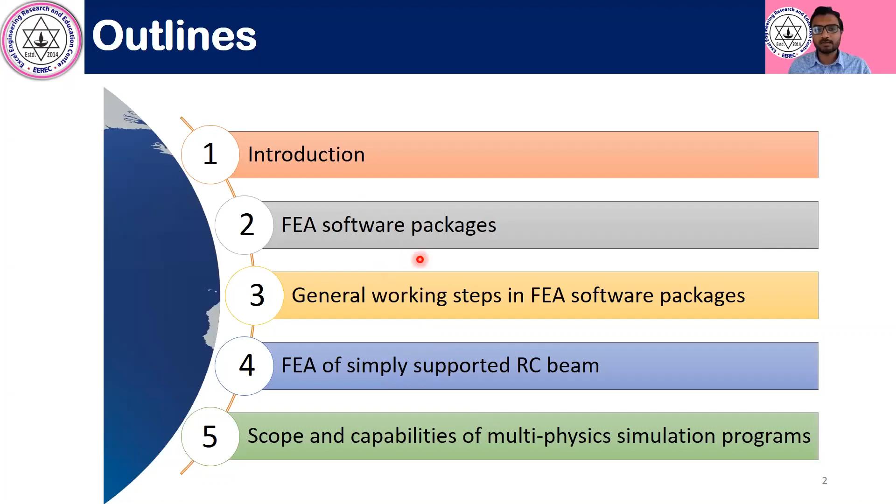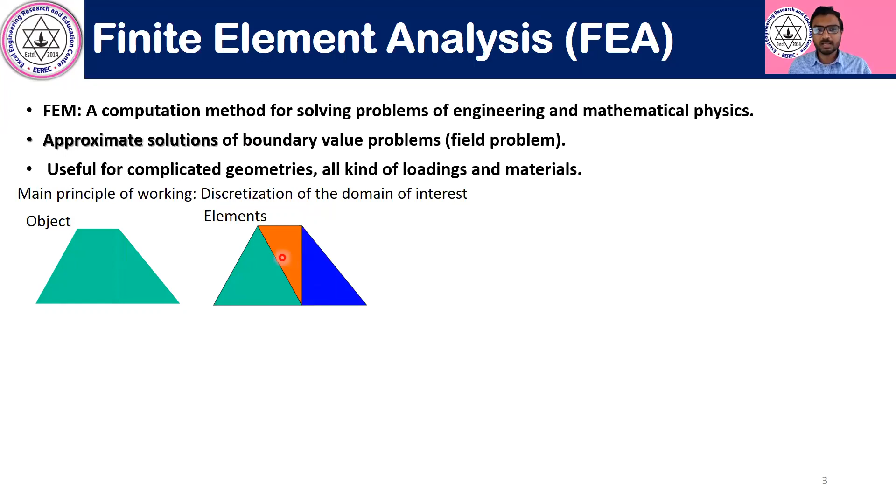FEA program. So first, FEM is a computational method that works based on the approximate solution of boundary value problems. The main working principle of FEM is discretization of the domain of interest. That means if we have an object or problem, we discretize this object into a number of finite elements, and each element consists of several nodes at its ends, and we know the solution at the boundary, and based on that solution, we interpolate the solution to the other nodes.

So in finite element, basically, we deal with nodes, and these nodes make elements, as we can visualize from this picture, and a combination of many elements makes a structural part, and an assembly of these parts makes a structure. For part and structure, maybe this picture would make it clear. For example, in this picture, this water is one part, this embankment can be considered another part, and the soil can be considered another part.

Again, in this example of a reinforced concrete beam, we can treat concrete as one part, stirrups as one part, and the longitudinal bars as one part as long as the longitudinal bars have the same diameter. So generally, a part is a structural component that has the same geometrical and material properties. Regarding elements, we have basically three kinds: beam elements, as in the reinforcement bars, then shell elements, plate, two-dimensional, and solid elements.

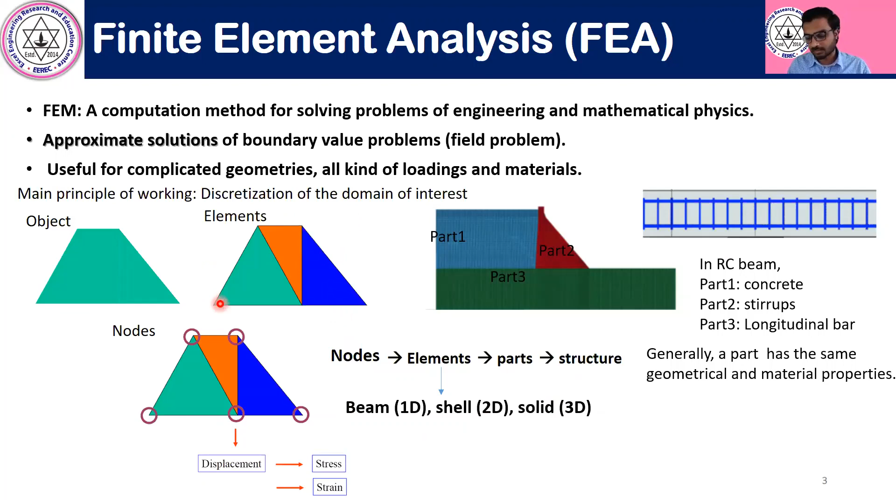In this webinar, I have not covered the theoretical aspects of these element types and different interpolation functions. Mainly, I have covered the practical aspects of finite element analysis. So, if we talk about the advantages of finite element analysis, according to IEEE, there are basically six main advantages.

The first one is that by using the finite element method, we can model any kind of complex geometry and irregular shape, as we can also visualize from this picture. Also, by using the finite element method, we can get results with good accuracy so that we do not need to test our physical prototype, which obviously saves time and money. And we have many short-term and long-term time-dependent simulation options and different kinds of boundary conditions in FEA software packages.

And finally, we can visualize our result in terms of different interacting environments like photo, video, graph. So it is really easy to understand what is happening in the structure if we simulate by using nonlinear FEA programs.

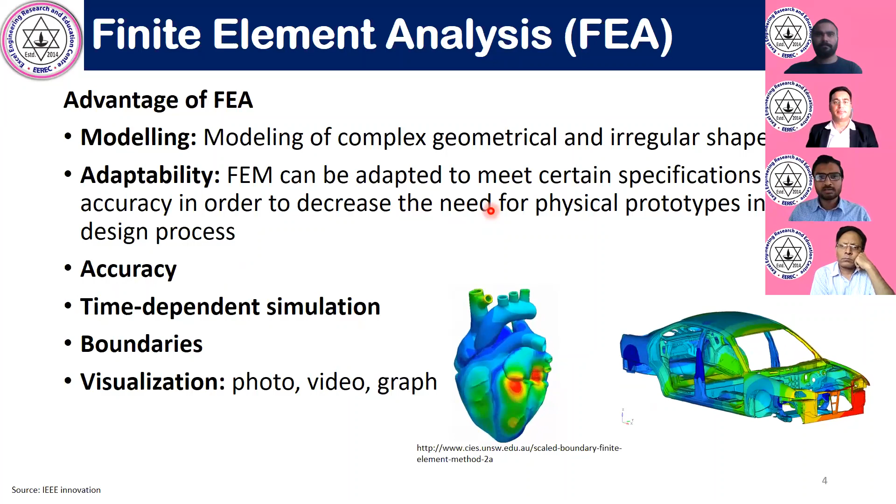Regarding the field of application of these nonlinear programs, generally we can use them in all sectors where we deal with stress and strains. So it covers all the aspects of engineering like civil, mechanical, aeronautical, biomedical, almost all those areas of engineering. If we typically talk about structural or civil engineering, we can use it to analyze buildings, bridges, or typical structural components like beam-column joints, or beam only, or interaction between fluid and structure, and different other aspects that we'll see in later slides.

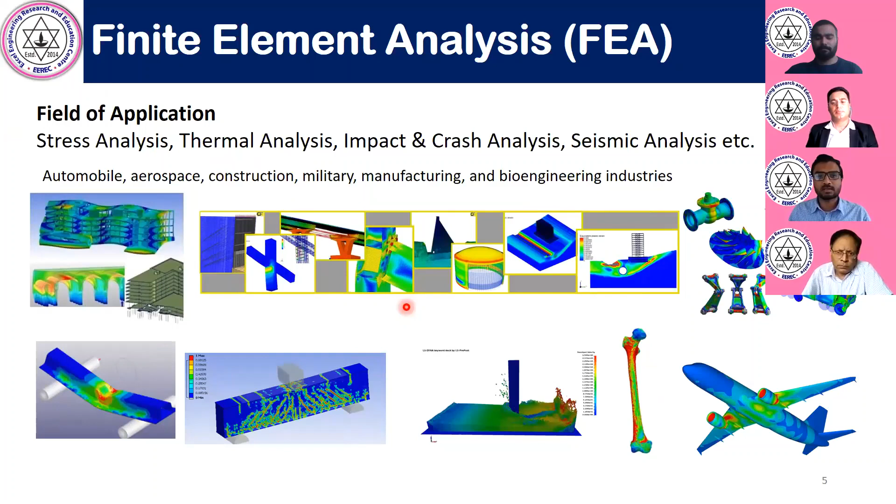So next, these are some of the FEA software packages, and I divided these packages into two columns. In the first column, software like SAP, ETABS, SAFE, STAAD Pro, and in the second column I put Ansys, LS-DYNA, Diana, and Marc, etc. And the main difference between these software, if I talk about the performance evaluation...

If we talk about the positive part, they are relatively easy to use, and they require very less computation time and resource. For example, we can solve a 4-story building model using ETABS in less than 1 minute. That's really a good part of it. And also it gives good accuracy for the global performance. One most important part is in most of these software packages, we already have the design code. So they are really suitable for design of standard or conventional structures like reinforced concrete frame, masonry.

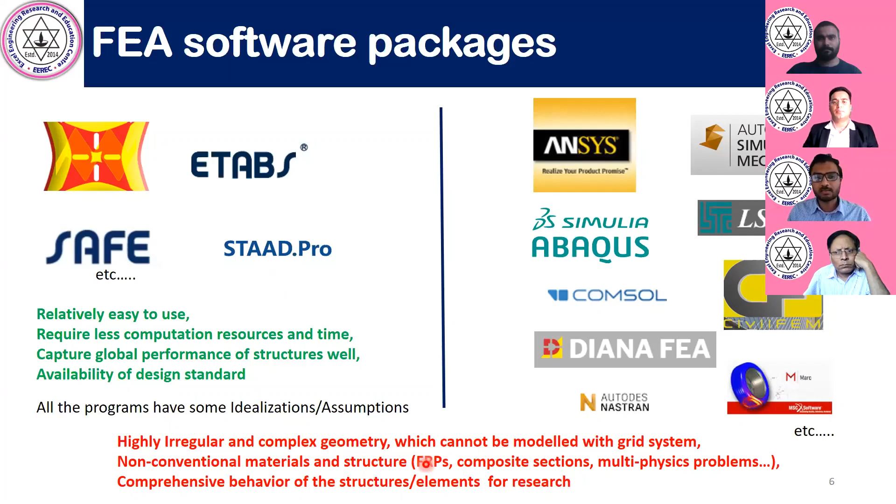But when we have to deal with highly irregular structures or highly complex geometries, then we cannot model with their grid system, so we need to move to slightly more advanced software. Also, when you want to analyze a structure with non-conventional material, let's say like fiber reinforced polymer or some composite section, then again they are not suitable for that kind of analysis. So we move to software packages like Ansys, LS-DYNA, Abaqus.

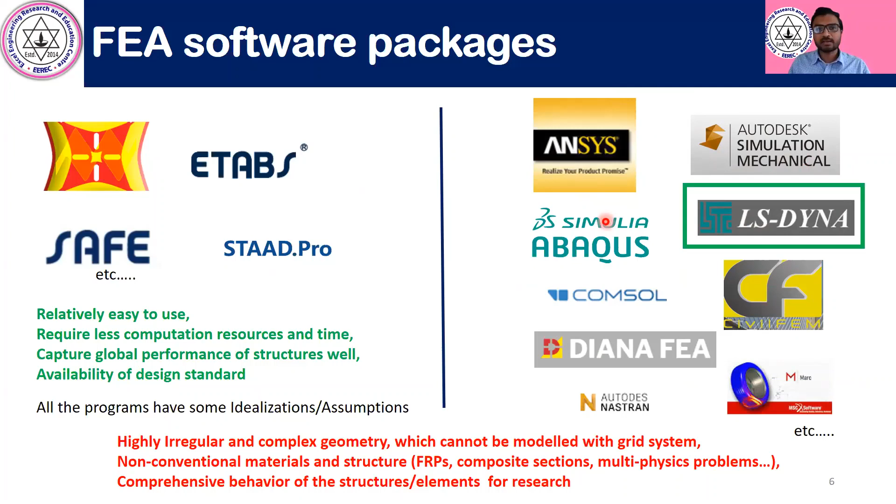Regarding the capabilities of these software packages, more or less they have similar capabilities. But in this webinar, I have been working in LS-DYNA, so most of the simulations are based on LS-DYNA. If we talk about LS-DYNA, this is a general purpose finite element code, and it is capable of simulating almost everything in the world. So all the complex multi-physics scenarios in the world can be simulated in LS-DYNA, and these are the major capabilities of LS-DYNA.

We can simulate from linear static, non-linear dynamics, crack propagation, real-time acoustics, almost everything in the world. And if we talk about some beautiful feature of LS-DYNA, we can couple two multi-physics scenarios, like we can, in the same model, consider structural and thermal part, or structural and acoustic, or all of them at the same time.

And also, if something is not available in LS-DYNA, we can create it by ourselves by scripting. So it is really useful in research.

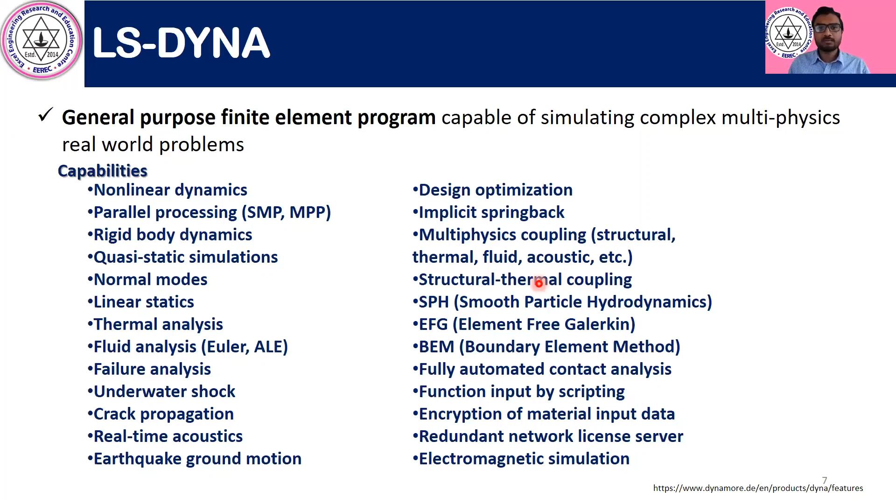So now we move to the next section, general working procedure. These steps are not only for LS-DYNA, but they hold true for almost all software packages. So we have, in general, 3 steps when working in FEA packages: the first one is pre-processing, then solver, then post-processing.

In general, pre-processing is the phase of preparation of the model. In the pre-processing phase, we create geometry, then we mesh, assign appropriate material model, and apply boundary conditions and load. After preparation of the model, we pass that model into the computer. In the solving phase, we don't need to do anything, everything is done by the computer, and it gives output. That processing of the output is the post-processing phase. For pre-processing and post-processing, each software package has its own user interface.

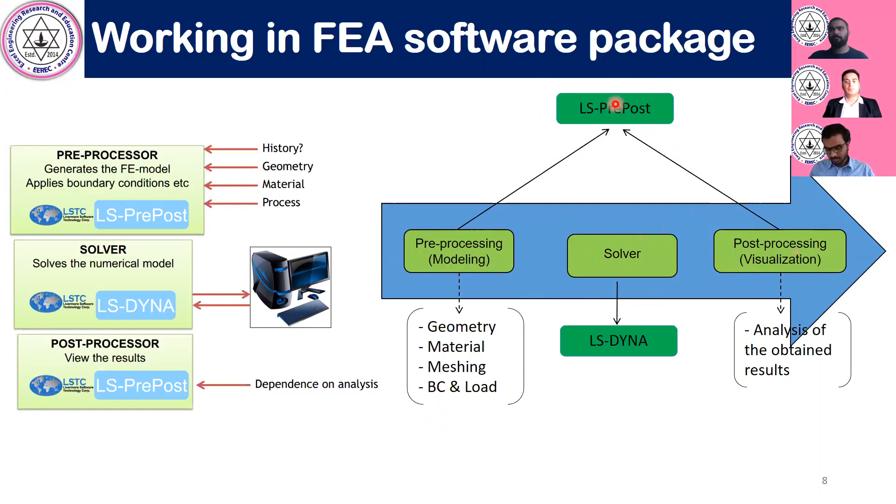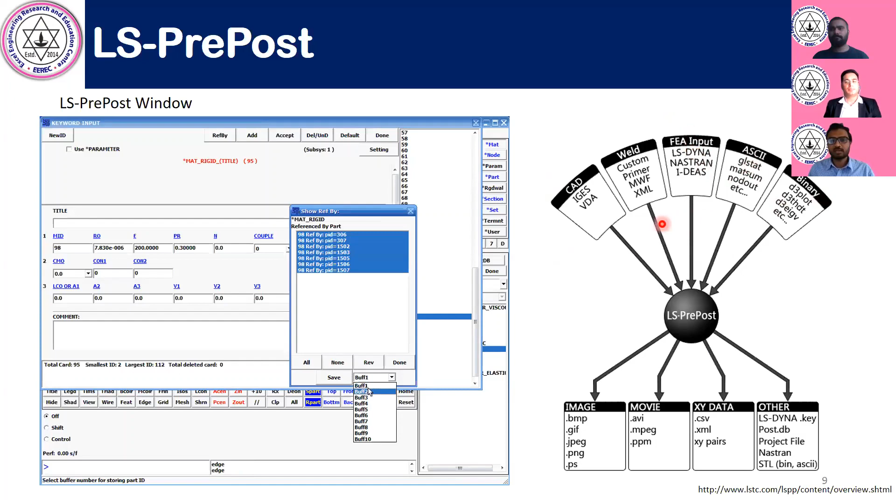For that, LS-DYNA also has its user interface, and we call that LS-PrePost. This is the graphical user interface of LS-DYNA. Here we can do many things, like we can prepare CAD for model, also welding option, we can input different finite elements, and it also supports ASCII and binary files. Regarding the output, we can get the result in terms of image, movie, XY plot, or different other standard interactive environments.

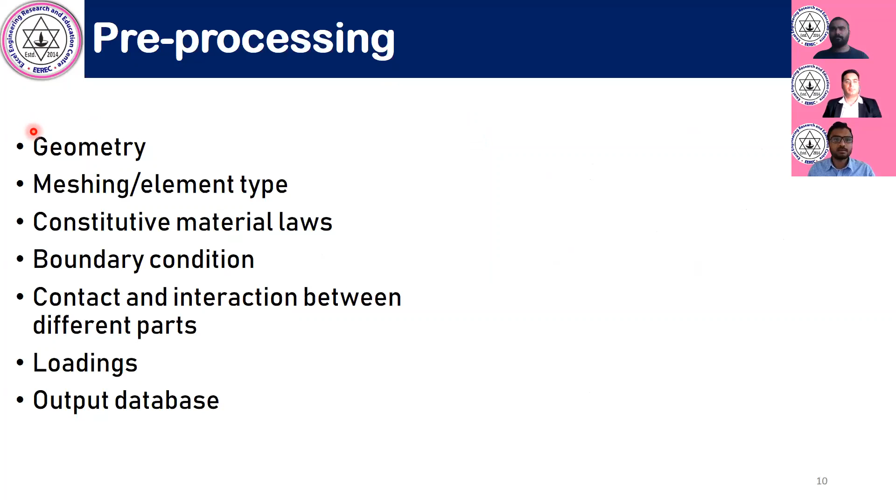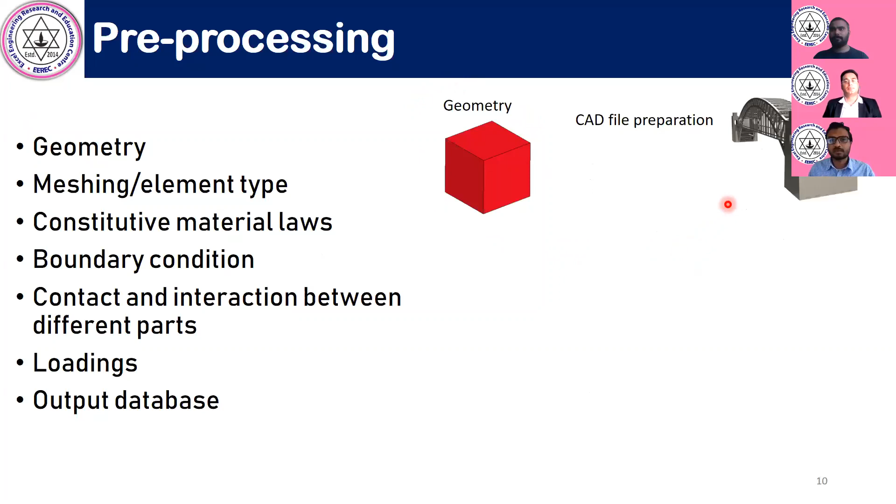So now after that, I would like to move to this section. Mainly these are the steps that we carry out in the pre-processing phase, and the very first step is geometry. So we just replicate the real structure in the computer in the form of CAD, and then we divide them into finite elements, that's meshing.

When meshing, generally we prefer fine and regular meshes, but one problem here is if the mesh is really very fine, the computation time will be very high. So we usually do the mesh convergence study to find the optimum mesh size at this step.

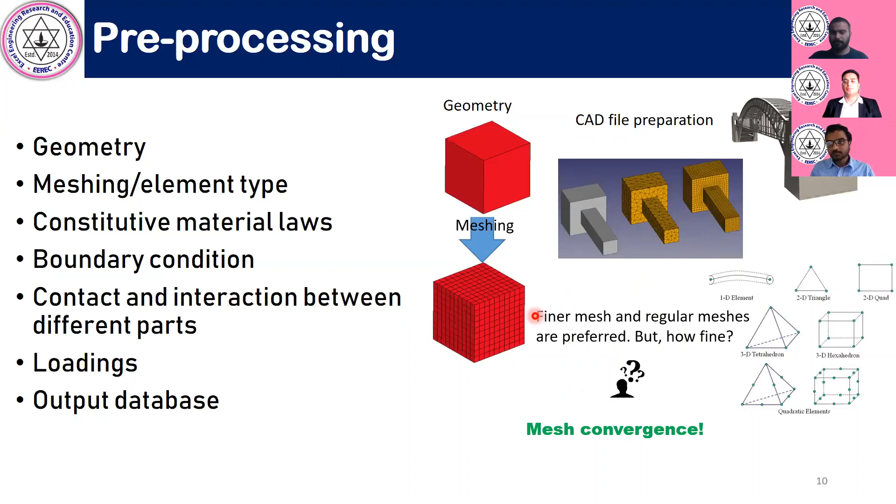After that, we need to select the appropriate material model, also called the constitutive material law. Its main function is to define the relationship between stress and strain at different loading states in the element. Initially, all elements have linear behavior, but in the non-linear range, different materials behave differently - some show brittle behavior, some strain hardening, some softening. When selecting this constitutive material law, we should have knowledge of mechanics of materials, how the material behaves in the real world, and the theory of the material model in that software package, so we can select the appropriate law. In LS-DYNA, we have more than 270 material laws, covering almost everything.

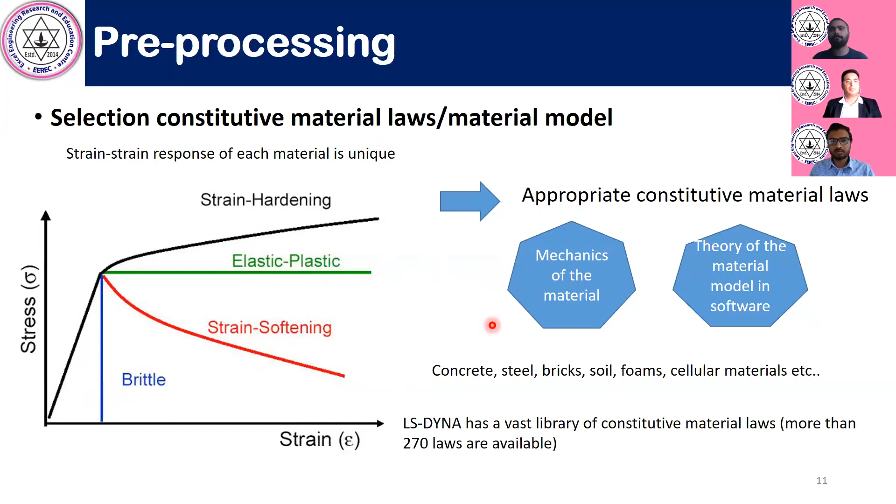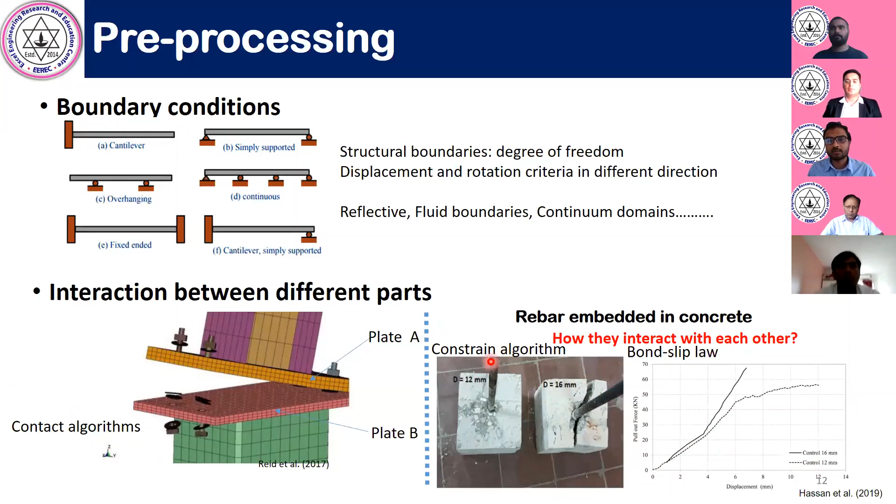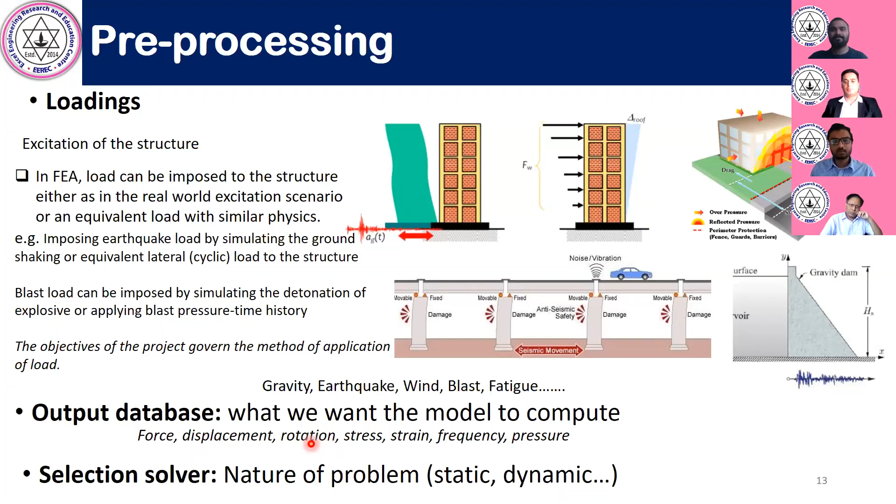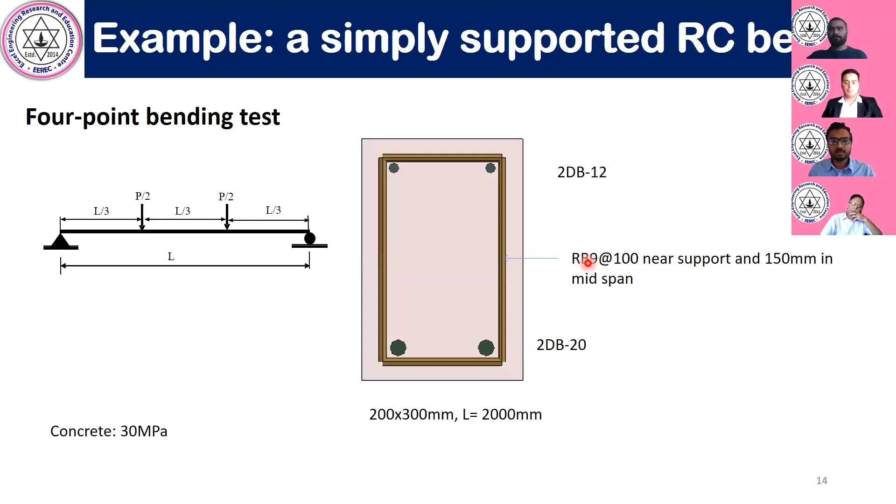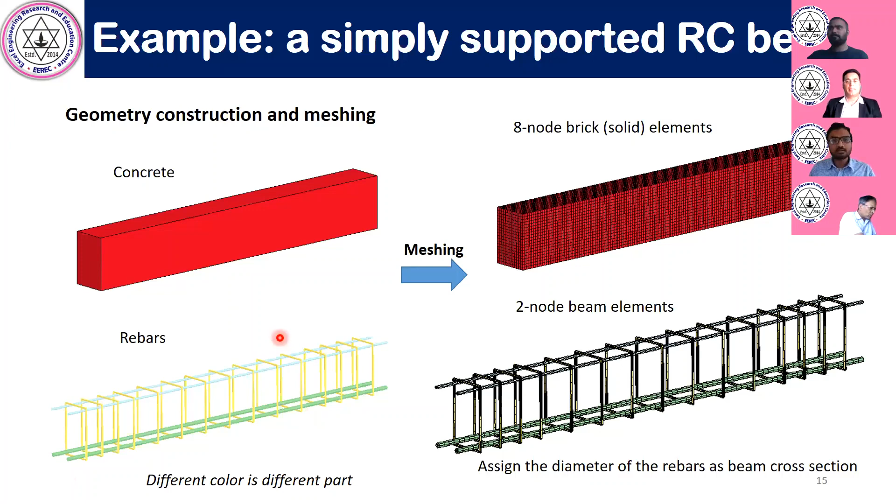The first step is creating the geometry for all the components - concrete, and we create all the rebars one by one, then mesh it into appropriate size. I used an 8-node brick element for the concrete and beam elements for the rebars, assigning their appropriate diameters. In just this small structure, I have 4 different parts: concrete is one part, top bar is one, bottom bar is another part, and the stirrup is another part. I need to define the interaction between them.

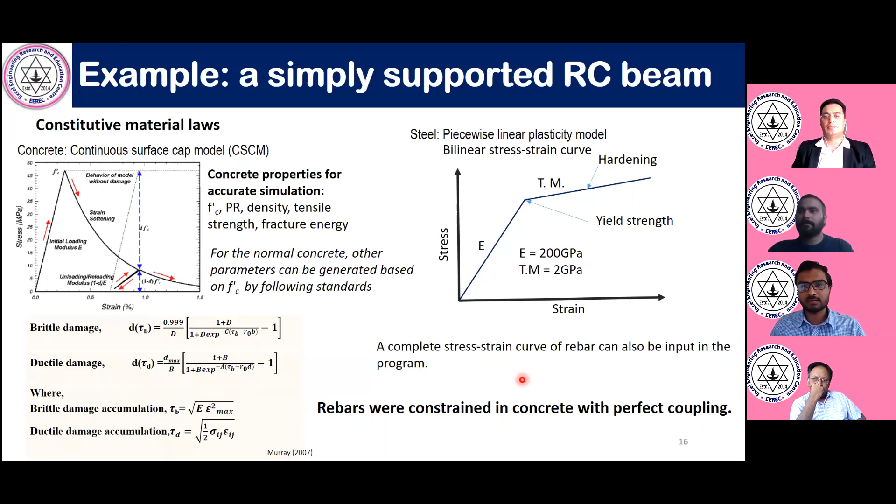In this simple problem, I constrain the rebar in the concrete as a perfect coupling, so they won't slip at all at any loading state, but it may not be valid for all problems.

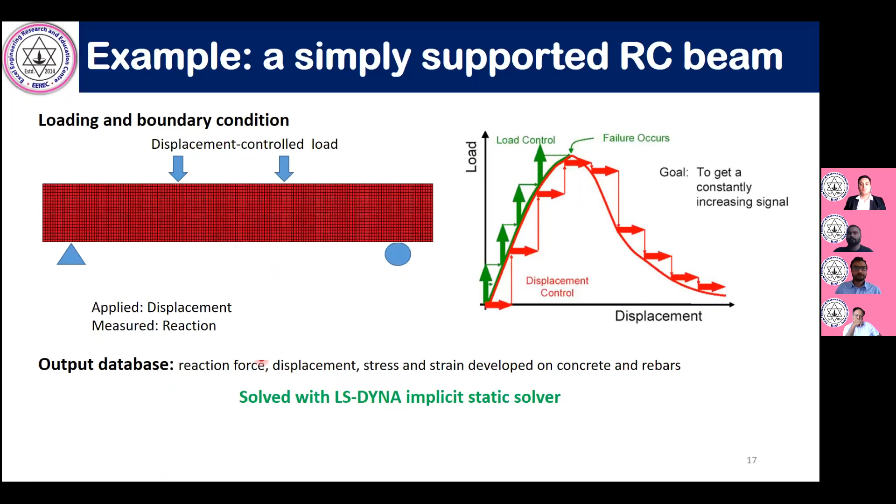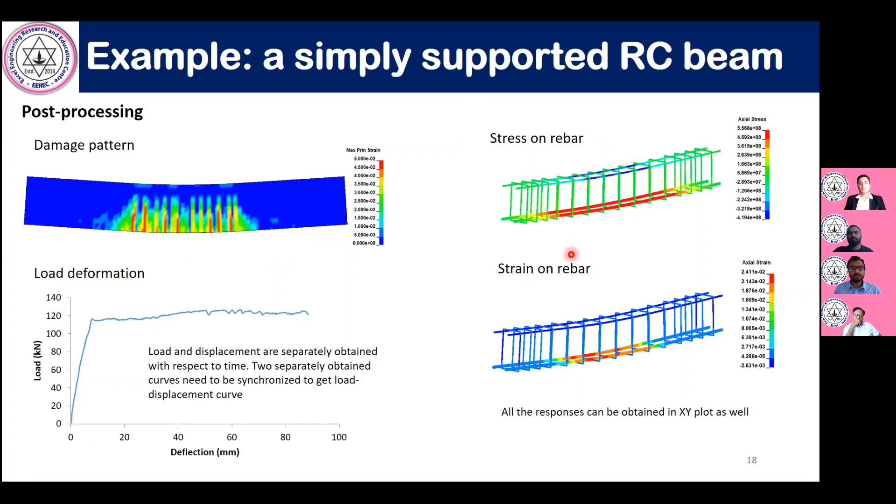The most important part here is how do you know these results are correct? Because software may not give the correct result all the time, so we should always verify and validate our model appropriately.

There are so many methods for validation and verification of the model. Following this book, generally verification deals with the mathematics or the concept. For example, for a static structure, one way to verify our model is a simple force reaction balance check, or for a dynamic problem, checking if momentum and energy are conserved. That way we verify the concept. But validation, which deals with physics or real world scenarios, the most widely followed method is experiment.

This is the same beam that I showed in the last slide. We can compare the response from the finite element model with the response from the experiment, so we can validate our model if possible. This is the most widely followed method in research for validation of our model.

But sometimes we may not be able to carry out the experiment for a large scale structure. In that case, we prefer some kind of pilot experiment, or we follow other theoretical approaches to validate our model, like mesh sensitivity, or checking if constitutive materials are working appropriately. If you are working in computational science and engineering, this book is really good to know about different techniques to validate and verify our models. I took all these methods from this book actually.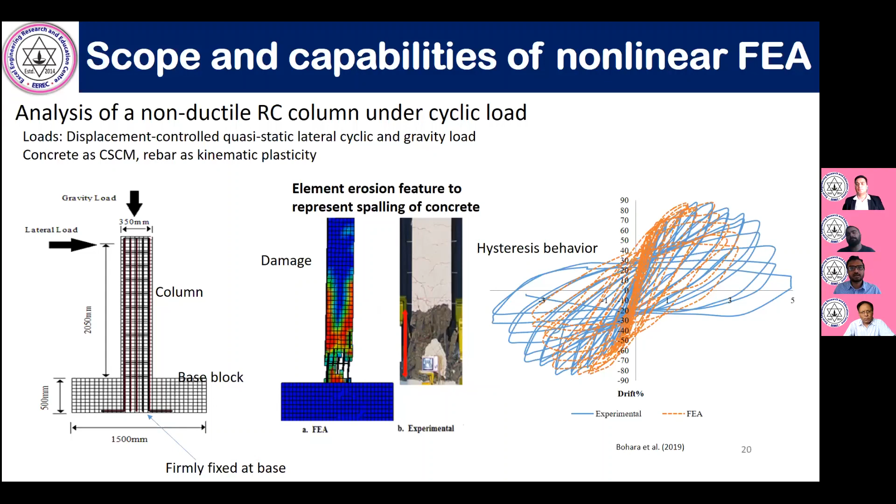Next example is analysis of a post-tension RC beam column joint under lateral cyclic load. If you are not familiar with testing of beam column joints, we only consider the portion of structure between the points of inflection. We apply a roller support at the end of the beam and a hinge support at the base of the column, then apply lateral load and gravity load from the top. We can see how accurately LS-DYNA has predicted the hysteresis behavior and damage on the concrete.

The most important part is pre-stressing. This pre-stress should be present in the structure before the external lateral and vertical gravity loads act on it. To simulate this kind of behavior, we need special features like dynamic relaxation in the software, which are present in nonlinear FEA programs like LS-DYNA.

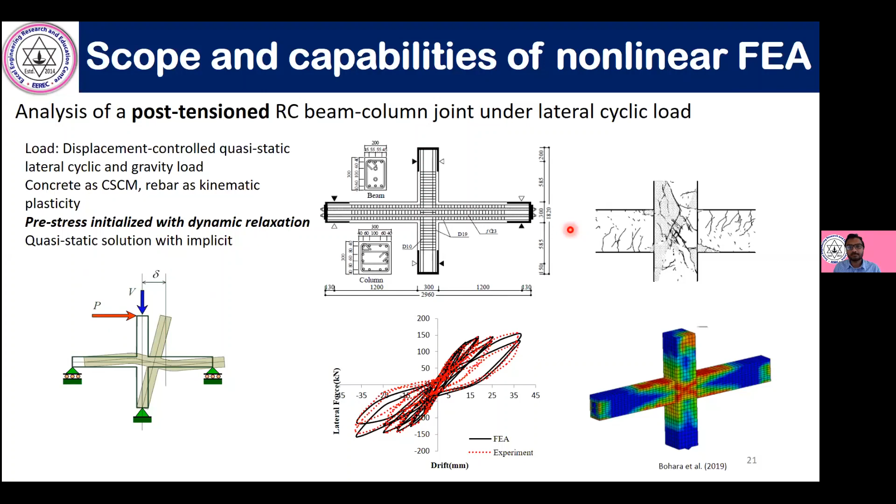The next example is about a composite structure with two kinds of concrete: precast and cast in situ. This is a typical beam column joint from this structure, and what we want to simulate is, under lateral cyclic load, how much slip occurs between the cast in situ concrete and the precast concrete.

Generally this kind of analysis is not possible with normal programs, since we have to deal with different kinds of contact for this interface. So we need nonlinear FEA, and using this kind of program we can also predict damage patterns and different responses like hysteresis, displacement, ductility, and load transfer mechanism.

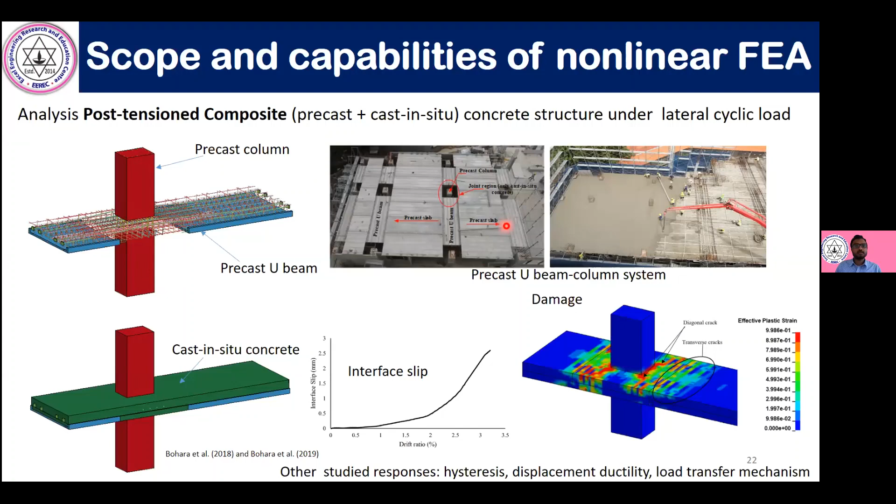Next is an example of a shear wall under lateral cyclic load. Here we applied the lateral load in the in-plane direction, and we want to investigate its hysteresis behavior and damage in the shear wall, the concrete damage at different loading points, and also rebar buckling and rebar fracture.

Here you can see how accurately the program predicts the hysteresis behavior at different stages, and also what is happening in the concrete and rebar at the same time. This kind of post-processing feature also helps us visualize and interpret our results easily.

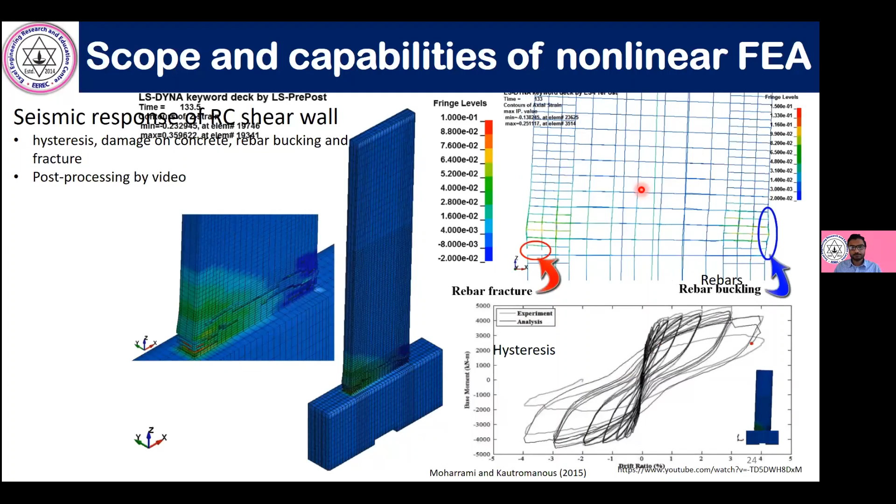The next example is an analysis of a steel frame. So far all the examples were based on lab tests, and this example is quite different than the previous ones.

Here we have a steel frame, and we applied seismic time history at the base. We want to see how this bracing works and what the ultimate collapse mechanism is for this structure. I'm not sure about the exact seismic time history used, because I didn't simulate this structure myself, but looking at the failure mechanism, it seems very high.

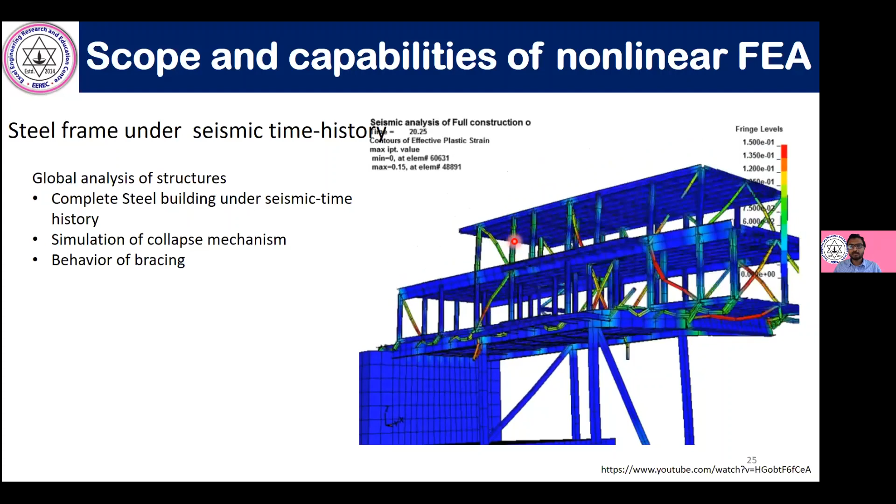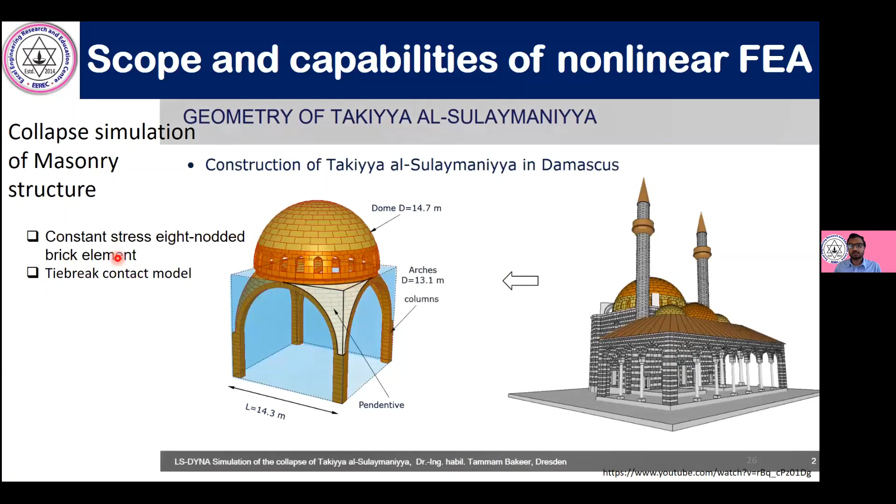The next example is a simulation of a mosque or masonry structure, and we want to see how this structure behaves under seismic time history. In modeling, the brick has been modeled with constant stress 8-noded brick elements, and the contact between each brick is idealized with a tie break contact model.

This is the seismic data in all three directions, and we can see the output in the program.

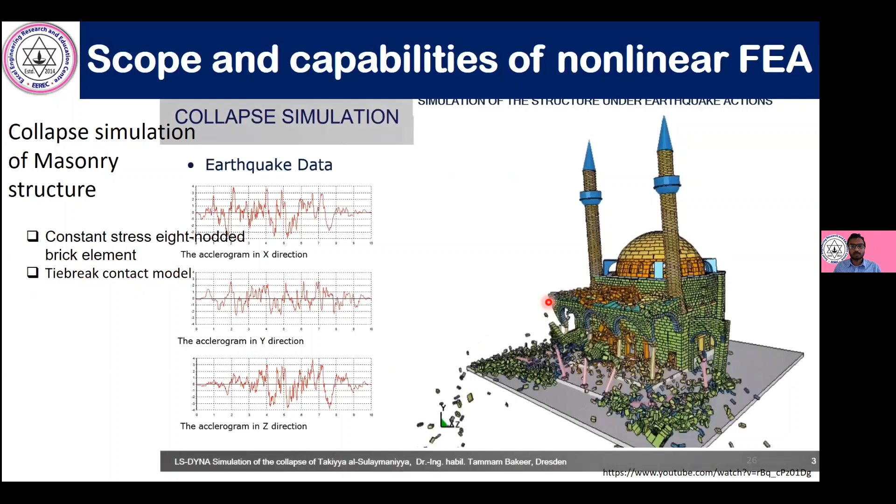Now I move to another example: road safety structures. As we know, these road safety structures are really important for minimizing accidents and probable casualties. We analyze this kind of road safety structure under the impact of a vehicle.

This impact of the vehicle leads to very heavy damage or very high deformation, so we cannot treat them with normal kinds of programs. We need nonlinear FE, and it should be quite advanced as well, because it is really difficult to simulate this level of damage using the program. As far as I know, most of the simulations and papers on this kind of analysis are based on LS-DYNA, maybe because of its large material database and other features.

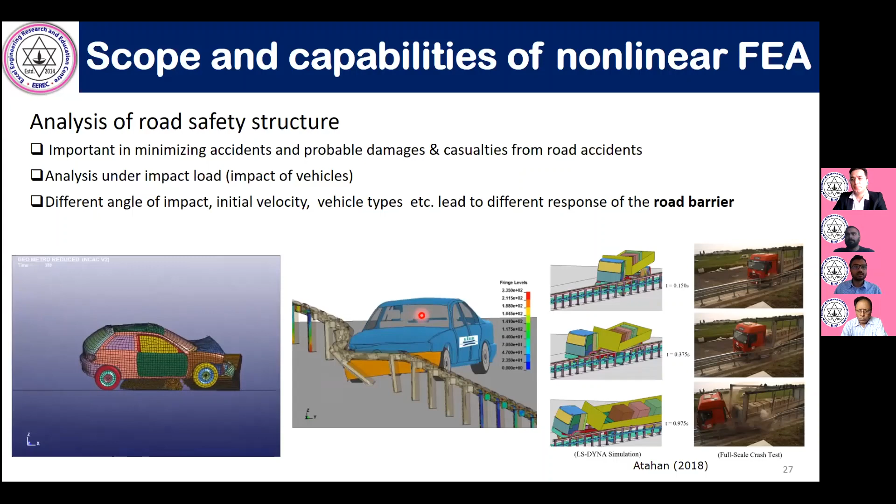And the next example here is analysis of railway structure. As we know, in railway structure we have several components of different material like steel rails, then concrete or timber sleepers, gravel, and subgrade. And at the same time, different kinds of load act, something like wheel load. At the same time, this rolling of the wheel causes friction and heating, and also the continuous loading and unloading causes fatigue. So we need to consider this multi-physics scenario at the same time. And for this kind of simulation also, we need to move to the nonlinear FEA programs.

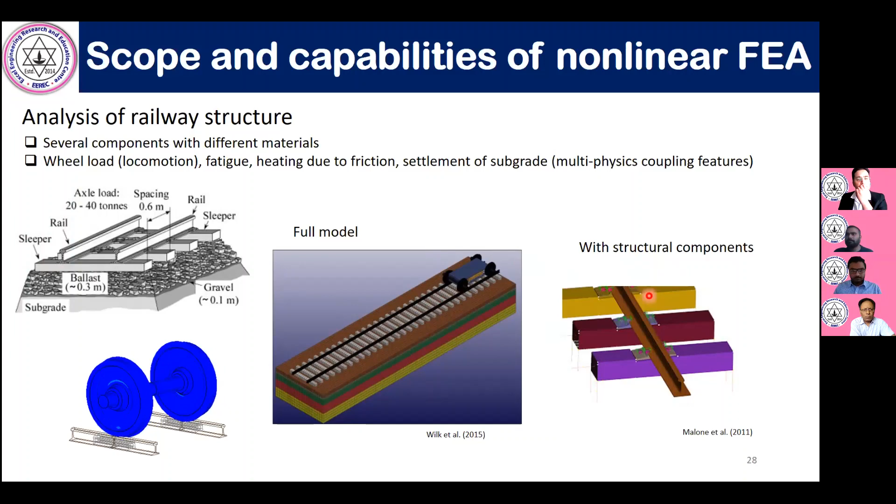And the next example here I have is a typical analysis of hydraulic structure. And the most beautiful part of this LS-DYNA is we can couple both fluid and the structural part, and we can see the response of structure and the fluid at the same time. Something like this is the deflection of hydraulic gate, and at that time what is the velocity and pressure in the fluid. So it really makes it easy to understand the problem and accurately simulate the physical behavior of the structure. And this problem was typically solved by using SPH, smoothed particle hydrodynamics, so that it is more accurate for the fluid problems.

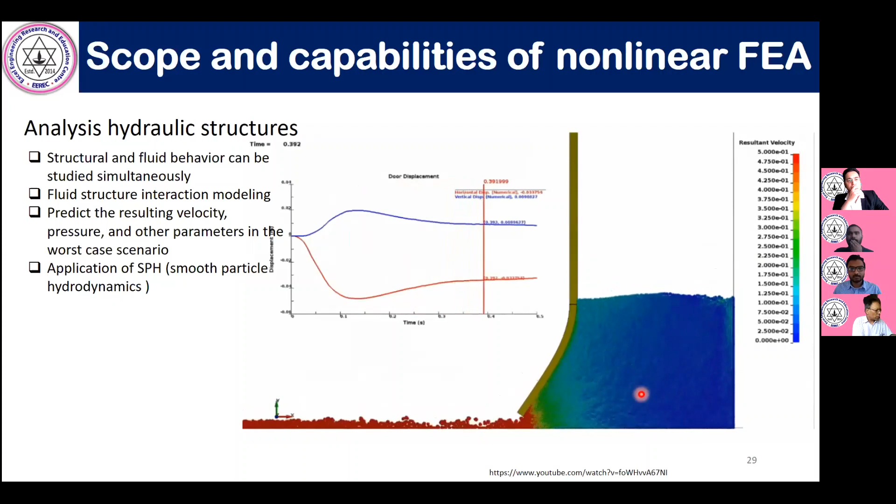And now I move to another example. This is a typical example of drilling mechanics. So we can do this kind of simulation as well in LS-DYNA. And this example, I think, is typically useful in civil engineering for analysis of rock during tunneling, and may be useful for predicting different stress and strain on rock. And also later it can be used for the analysis of support and other parameters in tunneling.

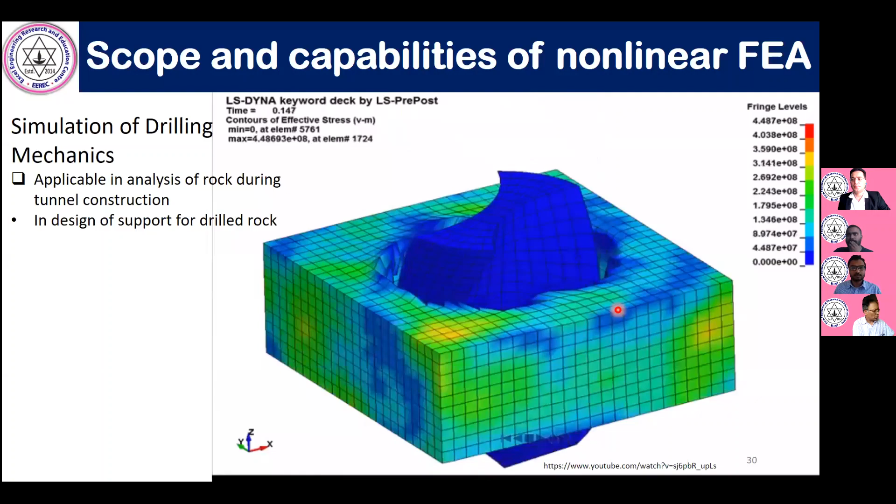And one more example is about the defense structure. And this small structure is called the earth-covered magazine. As I used to work with the Royal Thai Army for structural analysis, I typically take it from that one. So these structures are mainly used for the storage of explosives, and we analyze this structure based on the accidental scenario. Something like if one of the structures explodes, it should not harm the explosives in other ECMs, so that the chain reaction is prevented. So this is a typical analysis scenario of earth-covered magazine. So we just take the two structures and cause the explosion in one ECM and see what is the response in another. That's the design philosophy for this earth-covered magazine.

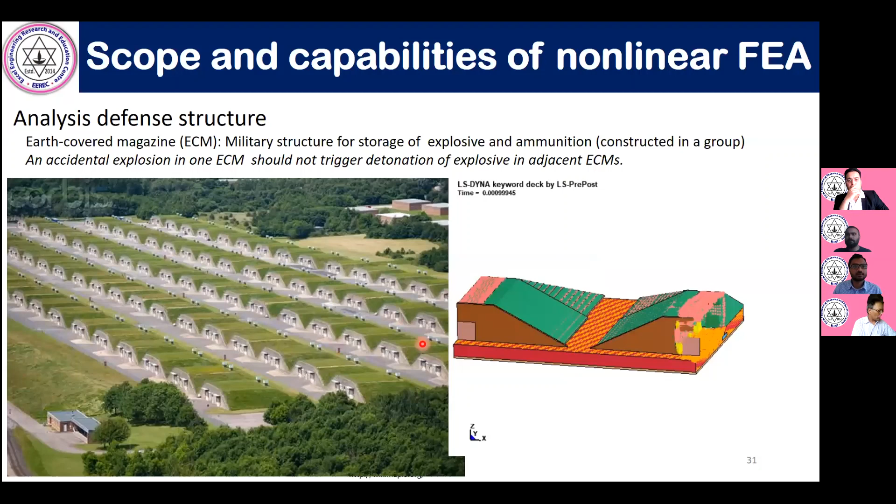And one more example from the defense side is analysis of soil blast scenario. And this scenario may be useful for two typical cases. One is when we analyze the structure or the vehicle under improvised explosive devices, or simply we call it ambush. Also, the same kind of analysis philosophy can be used when we estimate the rock or soil fragmentation using explosives in construction. We can estimate what amount of rock will be fractured, and what will be the depth and the diameter of this depression in the soil by using this kind of modeling technique in LS-DYNA.

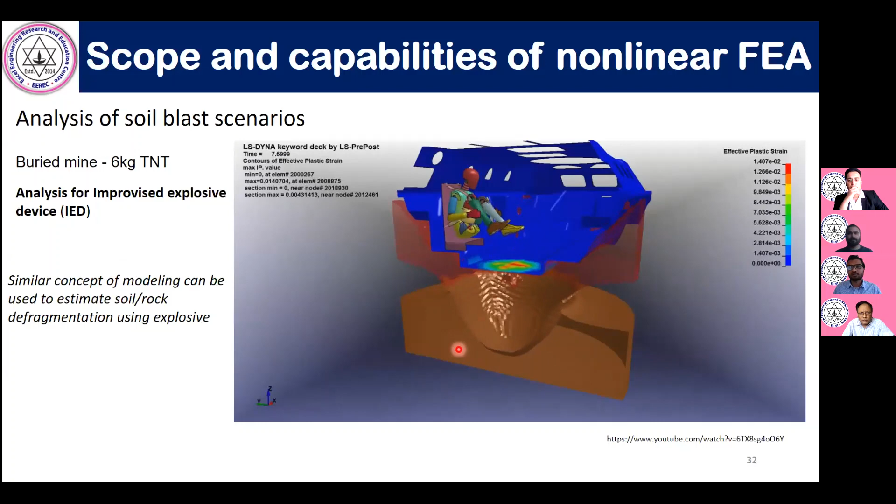And one more feature of this LS-DYNA is we have a facility to create new topology and shape. So this is a typical example I did for the impact load. This is the beam, and I have fixed these two ends. And what I want to do is get a new topology so that the reaction at these two ends is minimized, and the deflection of this beam should not cross this criteria. So based on this simulation, at around 40 iterations, I get this kind of topology, and you can see the response in these left-hand pictures. So the reaction has been significantly reduced, and also it has satisfied my deflection criteria. It didn't let the central deflection cross 110 mm.

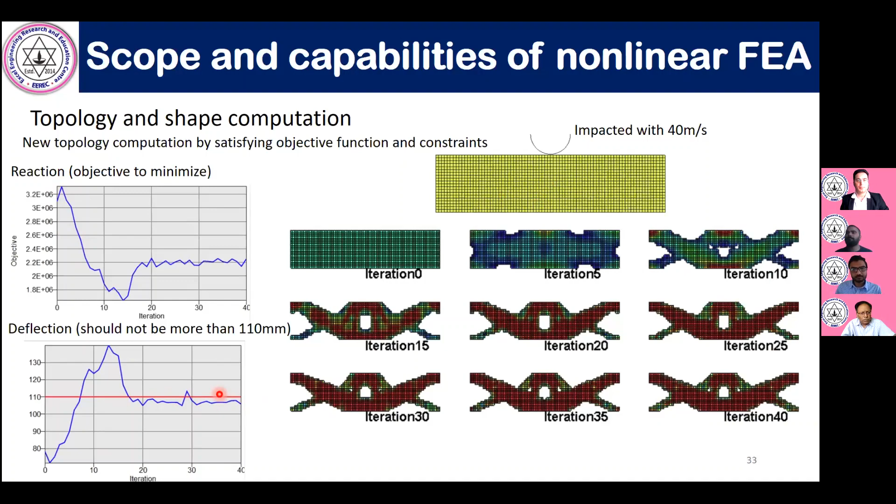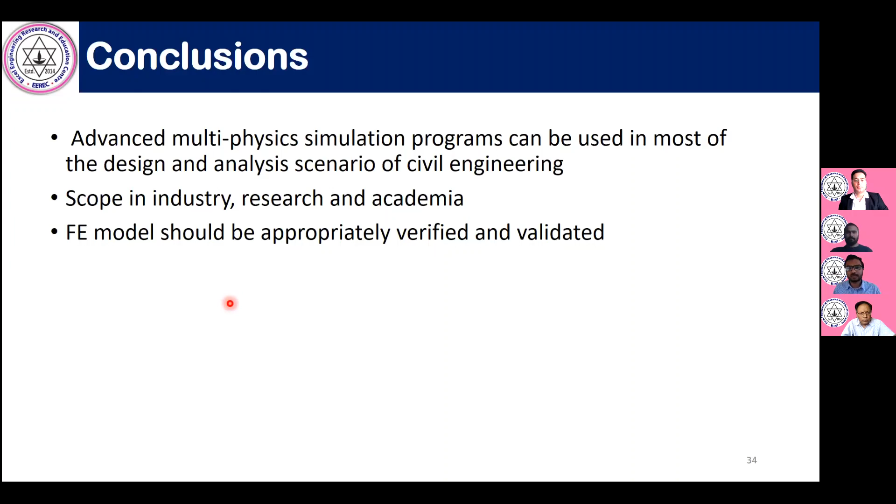Actually, that's all. And in conclusion, we can use these multi-physics simulation programs in almost all sectors, like industry, research, academia. Also, the most important part is before we present our results, our model should be appropriately verified and validated.

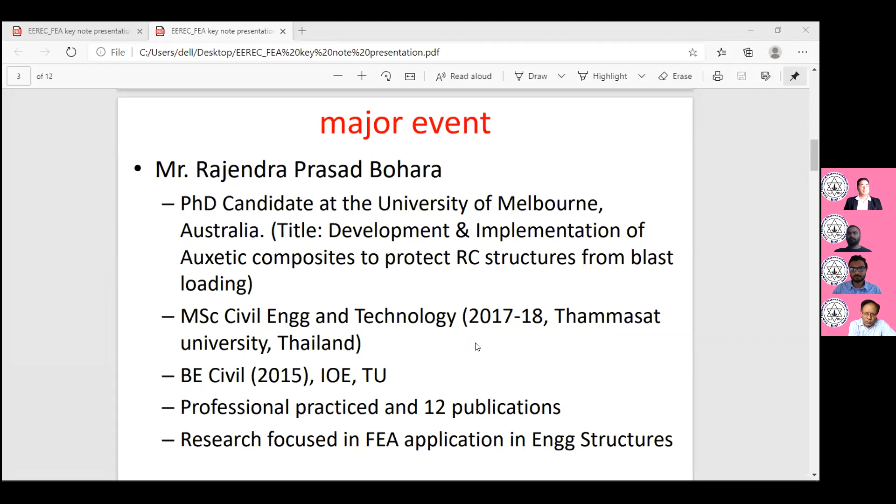He did his master's from Thammasat University, Thailand, and his bachelor's from IOE in 2015. I am glad to see that he has 12 publications and has practiced a lot as a civil engineer. His research was based on finite element applications in structural engineering.

So firstly, I would like to talk about computer programs and their uses in structural engineering. Mr. Bohara has already shown you different softwares, and categorized which conditions you should use them in and which you should not. To name a few, there's SAP2000, STAAD Pro, ETABS, RISA, and all these kinds of things he has already mentioned earlier.

Now the question is, what do we learn in undergraduate? That's the main problem. The basic thing is, in undergrad, students learn the fundamental, classical approaches. But when it comes to doing their masters and real practice, we seldom use it. That's because it makes engineers know how structures behave as per the theory of structure, but when you really need to apply it in practice, there comes a problem.

The problems you have to deal with and solve, you cannot do immediately. When you are a practitioner, consultant, student, or researcher, you may have very short time to do all these calculations. So we just have to understand that the softwares available to us are like calculators. For example, some time earlier, if there was no calculator, structural engineers still existed - they used to do all calculations manually and complete the task with a little longer time.

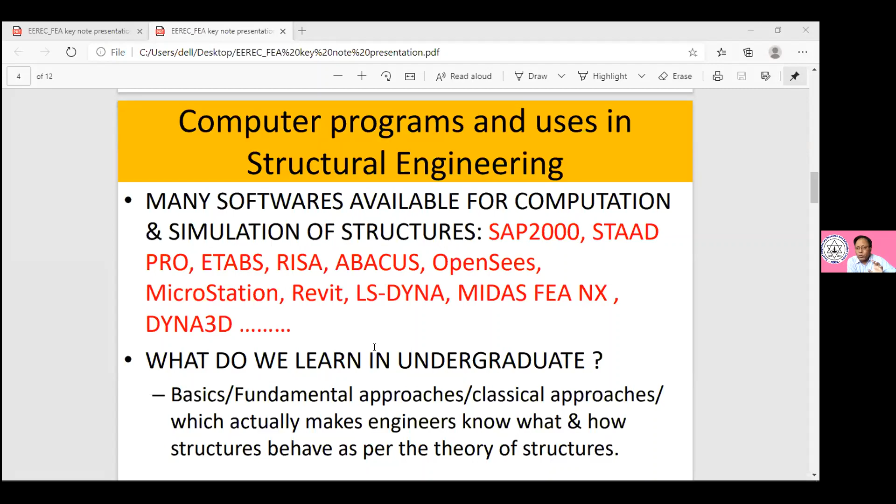That is one part, but the other part is you can even come to a very lower level and make yourself clear that your answer is right or wrong. And that is from the undergrad fundamental level. So this is why we should not forget that only learning software is very good, but to use the software in a very appropriate manner is very essential.

Okay. So here again, I have written this thing twice, like why software with FEA. You can see engineering practice needs stipulated time frame to perform the job or the research works that I've already explained. The theoretical approaches provide only maximum values of responses. Like when we used to do undergrad studies for bending moment, shear force, axial force, whatnot, what we used to get? We used to get the forces, the responses only at the nodes or in the center, midpoint.

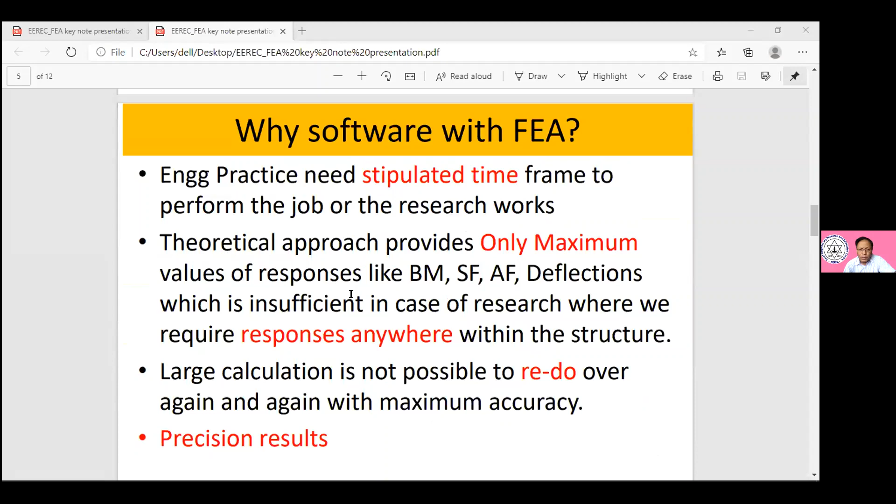But that does not serve for the researchers. And that also may not be good enough, not only for the researchers, but when you have to do some calculations of typical things like shear wall, if you want to find out the strains at every level, every point of the wall, then it is quite difficult with the general method. You cannot perform it. So that is why the softwares are there. And these softwares will be able to give you responses anywhere within the structure.

That is the advantage of this finite element method, because Mr. Bohara also indicated you can discretize the elements. If there is a beam, you can discretize it into a number of points, and you can get the results in every point. Of course, you can do that also by doing basic mathematics. For example, in basic mathematics, we used to take x as a distance, and then you do the calculation for that x point. But you get that result for x one time. If you change that x, you have to do it again, taking another x1. Again, you do the calculation. So it takes quite a long time to get the similar result.

That is the reason why this finite element approach gives you this facility that at one instant, you get very correct answer in a very short time. So large calculation is not possible to redo over and over again with maximum accuracy. This is the advantage of FEA over these basic fundamental approaches. And of course, the precision results we have already discussed.

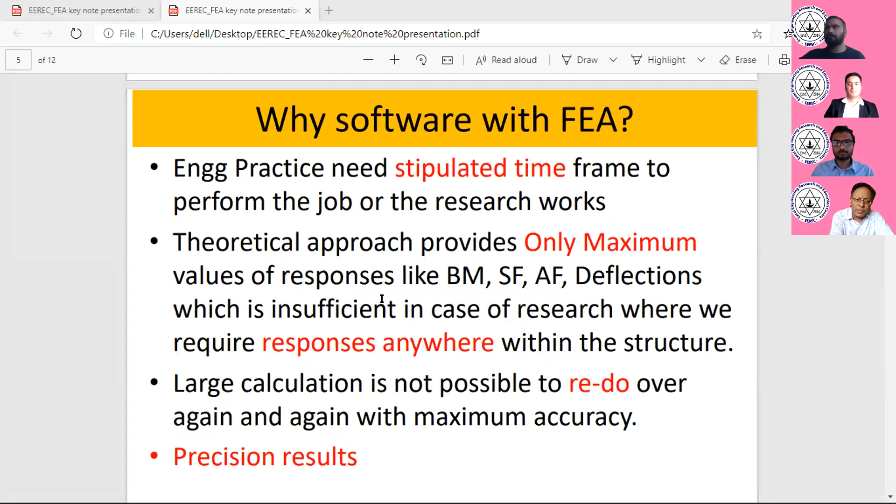Now the feasibility due to computer facility, how it became possible now. In the beginning, finite element analysis was considered not feasible till the computer age started, though it was developed by engineers in the mid 50s to address structural mechanics problems related to aerospace and civil engineering. But after the development of computers, the finite element method revived, and large computations were possible in short time. After 1969, it took some pace. Later, with powerful computers, the FEA took full swing.

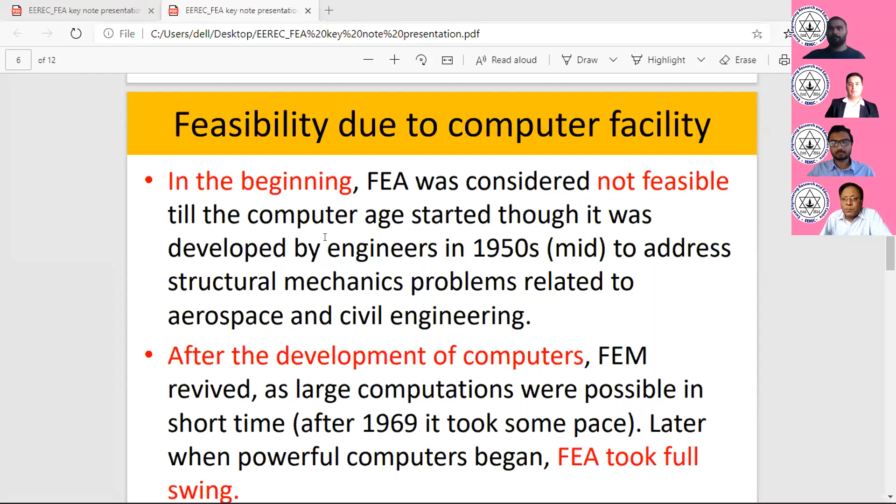So people, the mathematicians, started using the finite element method, finite difference method, all sorts of methods like that. And at one stage, it was not popular because there was a large volume of calculations needed to be done. Even when we teach finite element method in the master's degree, we can only make them solve simple beams, simple elements manually. We cannot solve all these problems manually using the finite element approach because there is a large computation. And this computation problem was solved because the computer was there.

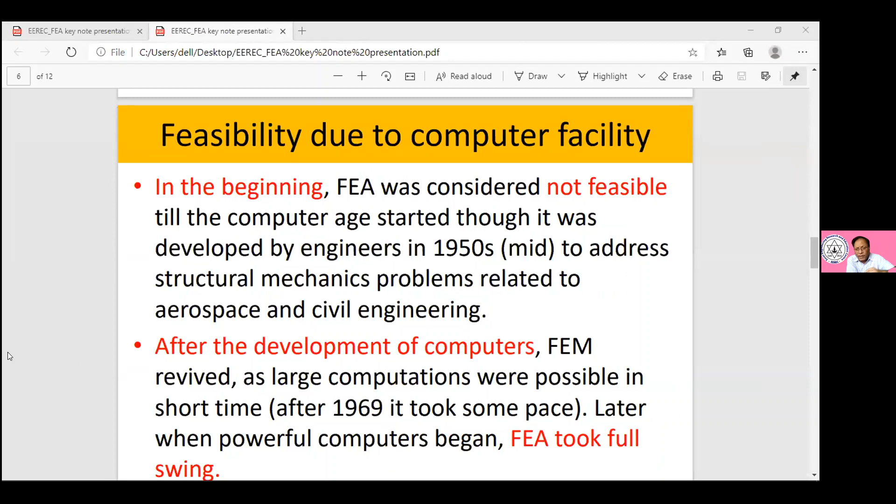So after the availability of computers, and now the supercomputer to calculate large volumes of mathematics in a very short time, these computers are giving us every possibility to solve these problems. So that is why this finite element method revived and became very popular. So let me give you one example. It's a very simple example because I always want to give examples with very simple things so that it will be easy to understand and then implement also.

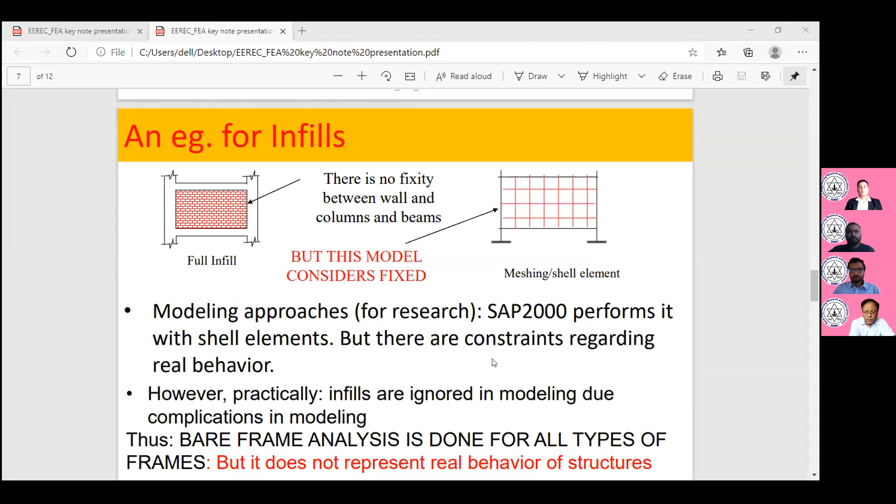However, practically infills are ignored in modeling due to complexity. And again, if you start doing bare frame analysis, you see it's done for all types of frame, but this does not represent real behavior. This I have already explained. Then, if you want to do some research, you must identify or know how the real behavior actually happens.

For example, if this is a wall, then the wall is connected to a concrete frame with these void parts, where there is possibly mortar only. This mortar is not brick. So the behavior of brick and the behavior of mortar are different. And also the behavior of mortar is different to the concrete. So these materials are different, and their stiffness, their strength, their Young's modulus, everything is different. So if the behavior during the lateral force is also different, then that should be incorporated in your model.

For example, in this one model I have taken an enlarged form of this joint. Then I have placed K over here. That means the mortar will possess its own stiffness. So you should know how to connect this mortar with the concrete pillar over here, and of course it has to be done all around, because there are two beams and two columns. So you should be able to connect these, and you should know the value of the stiffness K. If you know this, then you can directly apply it in the software, and the software will do the calculation for you.

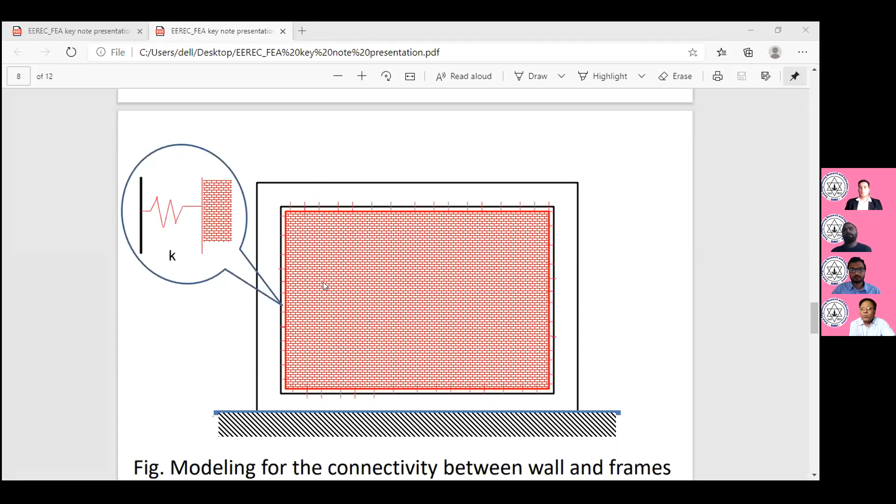But if instead of putting this K, you join this wall to this column and start doing the analysis, then it is just like joining the concrete and wall together as two fixed elements, which is not the reality. Okay, so we have to be careful while modeling these elements and considering the material strength. And that is where the undergrad course also helps us, because all the parameters like Poisson's ratio, Young's modulus, bulk modulus, we get the idea of all these things in undergrad. And we have to use those concepts in the finite element softwares.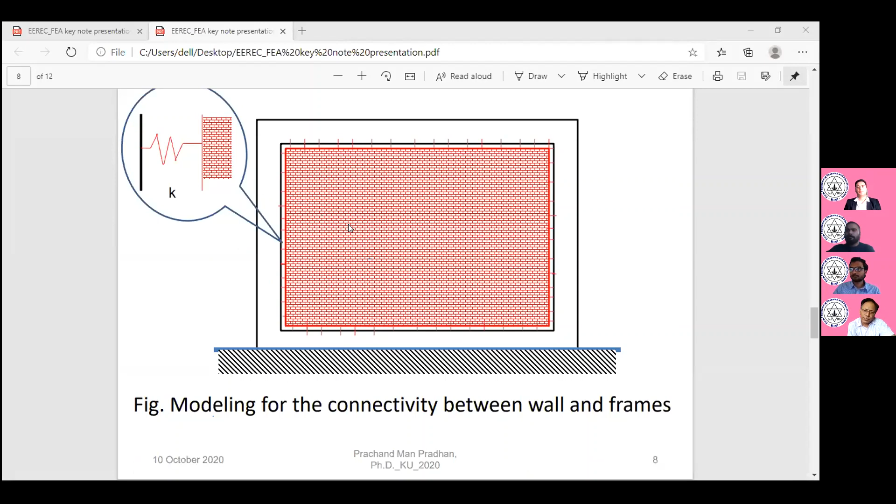So let me give another example over here. What actually happens in a lateral load case for partial infill frames? When I say partial infill frames, that means the top part of the frame is left open for ventilation or light purposes, and the bottom part is constructed with the wall.

So during an earthquake, the frame may behave like the second one on the right with the wall. And if the wall is not provided, making a simple skeleton structure, then the deformation looks like the one on the left. So if the deformation is like this on the left, but you want to put the wall in the model, then how can you design and analyze the structure without incorporating the existence of the masonry wall?

Then it will not give the correct answer. So if you put the masonry wall in the frame, then obviously you will get a good or correct result. But how to do that? Again, to do that you need to know the model, the real behavior, and how to model the wall element into the frame.

So these are some of the things that you should know. Only knowing the software is not enough, that is my point. You have to know the real structural behavior. Once you know the behavior of the structure, then it's not difficult to put those things together in the model. This is very important.

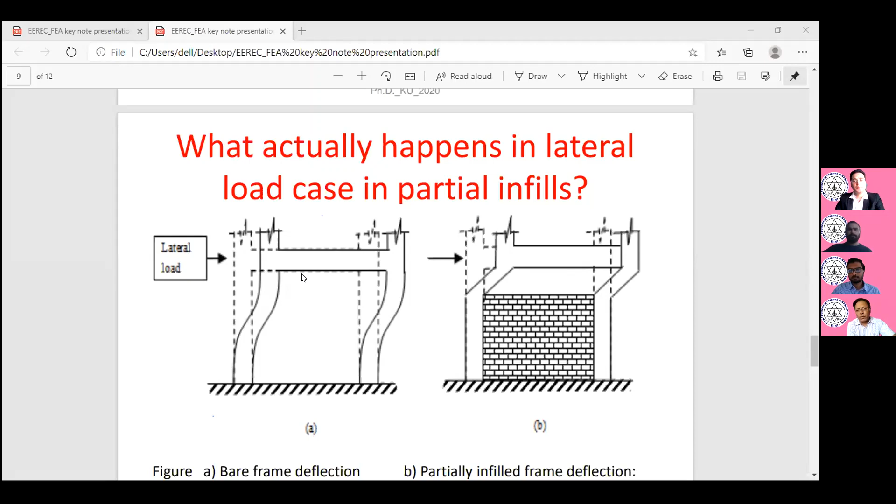So let's take one example. If this is a partial infill, without going for very big software like the examples Mr. Bora had given, for lateral loading, either dynamic or static, you can model this element by knowing the Young's modulus of the whole wall, and then provide the connection with a diagonal strut, as we call it the diagonal strut method.

Then the problem is, if you don't release the moment at this junction, the behavior will not be exactly as it should be. That means if you only join this strut at these two diagonal points, it will behave differently. But if you release the moment here, it will again behave differently.

And if you check it with experimental results, they will tally or validate better with the one releasing the moment. So this is just one example to show that if you do not know how to use the software properly, you may get an erroneous result, which we do not want.

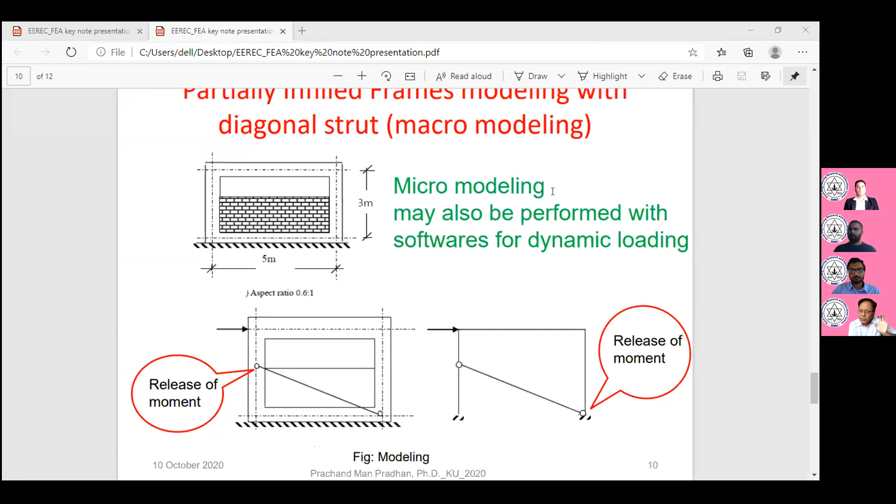We are using the software to get correct answers, not wrong answers. That's the point. So I always urge my students, structural engineers, and professional practitioners that you must know the software's limitations and its full capacity, and only then try to use it. So finally, my few words here: the result output depends upon the input data.

So wrongly fed data will give wrong results. This we have already discussed. For research aspirants, please begin with the fundamentals and only start using software to solve your problem as a tool.

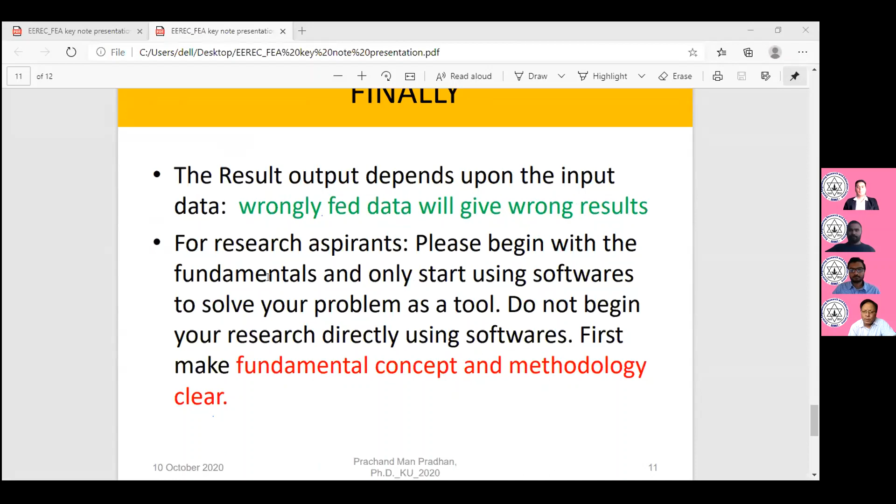For example, consider there is a problem, and if you want to solve it, first think how you're going to solve that problem. Suppose you have a calculator with you, and you want to add a couple of numbers together. If you are clever or smart enough, you just start calculating in your brain.

You'll say, okay, 2 plus 2 plus 5 is so much, so much, and then you give the answer. But if the volume of values to be added is too long, then the problem is adding these large numbers. If I start adding with my brain, it may take a long time, or the answer may also be wrong. So what I need is a calculator.

If I get a calculator and start using it to add these values, I will get a good result. But if I add these in a hurry and enter wrong values, then the answer that comes out will be wrong.

So the point is, firstly, identify your problem and think about whether it can be solved, and which software is most appropriate. You should also know the capacity of that software, whether it can do the things you want or not.

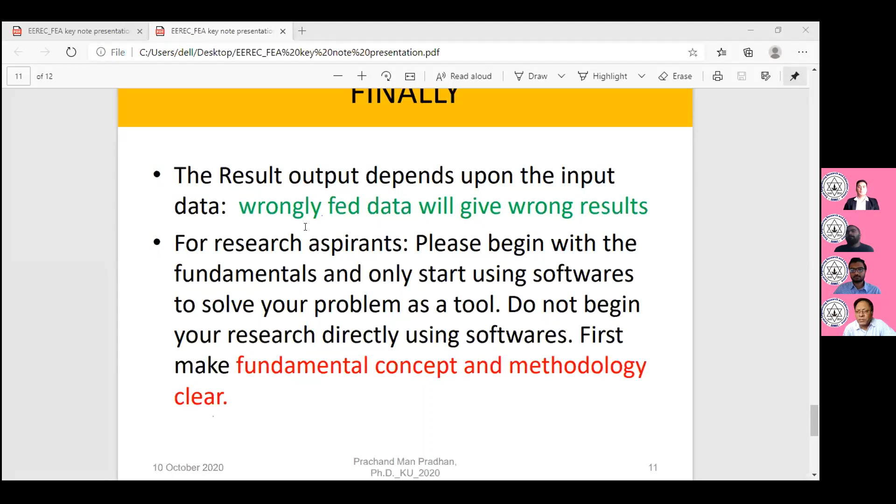It is not possible for structural engineers like those 200 years back, when structural engineers used to construct big things, but imagine they used to take maybe 1 or 2 years. Nowadays, we can even design a structure within a few hours if we have time, and if the problem is smaller, or at most 4 or 5 days for big structures. This is the difference because of the finite element approach.

Okay, so with this, I would say think smart for the society and use computing tools properly. Thank you for listening, thank you very much.